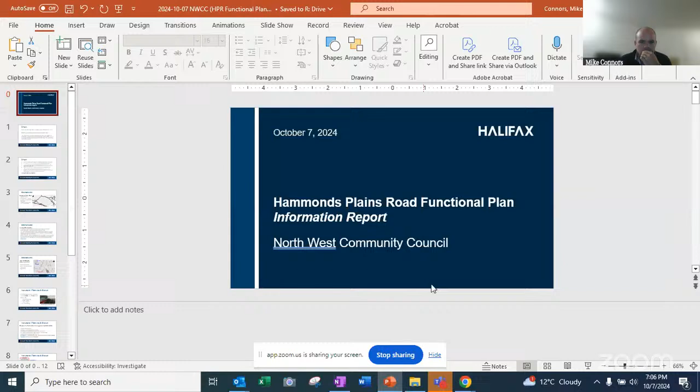Okay, our presentation. Hear me okay? Yes, excellent. I will share my screen. Let me know if you see it. Yes, thank you. You might want to just expand that. Yes, there we go. Perfect, thank you Mike, okay good.

Thanks very much. Mike Connors, Manager of Transportation Planning, happy to be here today to talk through the Hammonds Plains Road Functional Plan Information Report that was at the Community Council meeting last month. I'm joined by Leah Perrin from Regional Planning, who will be able to help in answering any planning-focused questions. Just a couple minutes to summarize the contents of that report. The origin of this report was from last October, and it asked for a staff report outlining and prioritizing the steps needed to initiate the planning and consultation process to develop a functional plan for Hammonds Plains Road.

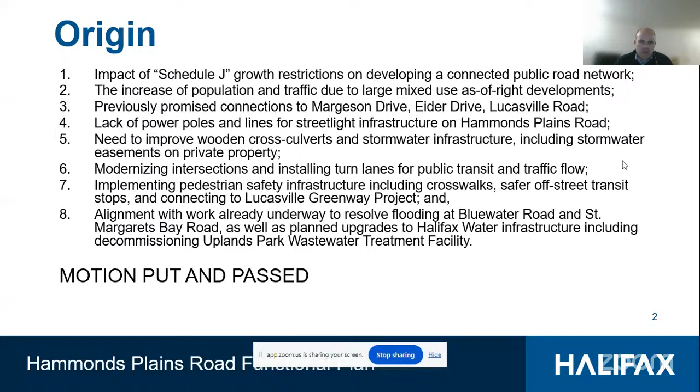The report should include the following, and there were 8 different issues that were identified. This report has gone through and talked about these issues and about the functional planning process and how it could potentially be applied to Hammonds Plains Road. I'll give a little bit of background on the area and then talk a little bit about what's in the report.

So Hammonds Plains Road is an arterial roadway. It runs approximately 19 kilometers east-west from Tantallon to Bedford. It's a key route both for regional and local traffic. Obviously it's the main thoroughfare for people that live in the area and the communities it runs through, but it also plays a role in moving regional traffic given its connectivity between Highway 103 and Highway 102. So you see both regional and local traffic using it regularly.

It's a long corridor, 19 kilometers, with variable geometry, so it doesn't look the same throughout. West of Pockwock Road, it's more of a true arterial road with well-spaced intersections and access control. Between Pockwock and roughly Larry Uteck Road, it's more of a rural cross section, rolling hills, lower density residential and commercial abutting uses. Then as you get closer to the 102, it widens out to 4 lanes around the highway. So it's quite a varied corridor, but that's expected given how long it is.

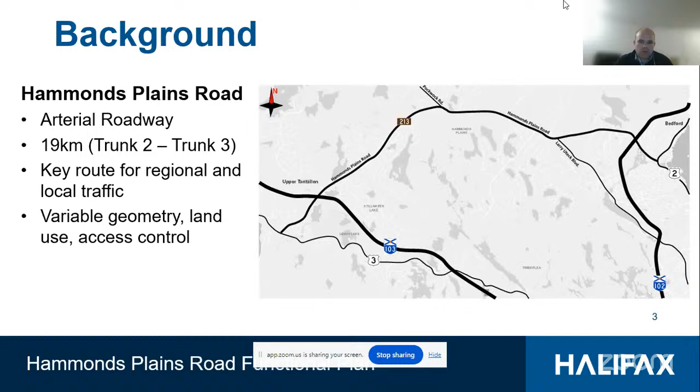A little bit on land use. There are restrictions on development that have been in place in the Beaver Bank, Hammonds Plains, Upper Sackville area since 1998. The 2006 regional plan further restricted development within these areas by limiting residential subdivision, known as Schedule J, until transportation capacity is increased. Despite Schedule J growth restrictions that limit development in the area, there are several as-of-right developments that have been permitted to proceed on existing lots and on new lots proposed on existing public streets.

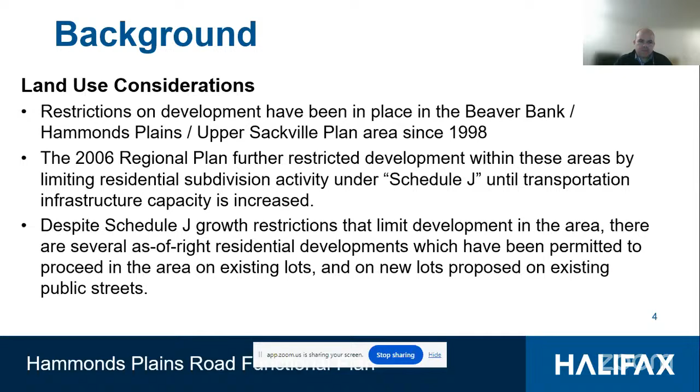There are a few key future potential road network improvements that relate to Hammonds Plains Road. The Beaver Bank Bypass and Middle Sackville Connector have been proposed since the 80s and 90s, a collector road that would extend north from Hammonds Plains Road to the 101 and beyond into Middle Sackville and Beaver Bank. That project has been idle for a couple of years, but HRM has purchased some of the corridor required to build the road, though it's currently not actively moving.

Sussex Drive is a proposed community connector road between Stillwater Lake and Hubley. There have been some land issues, and it hasn't really moved much in the last couple of years. And finally, Highway 113, a proposed provincial highway that would connect between Hubley and Bedford, connecting Highways 103 and 102. That project is a longer-term priority for the province as we understand it.

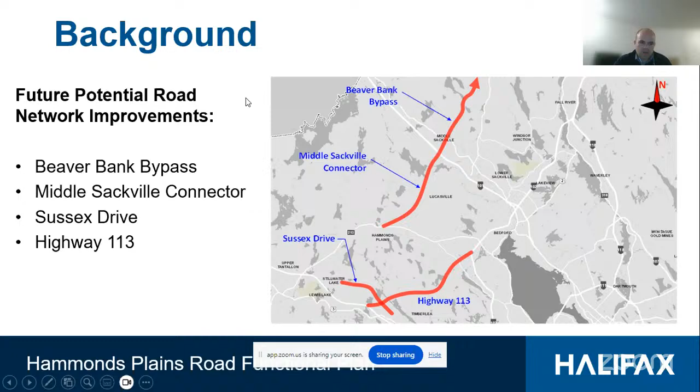I wanted to take a minute to talk about the functional planning and design process, just so everybody understands what that means. We've done a few of these in the past few years, guided by the Integrated Mobility Plan, looking at strategic corridors and reimagining what they can do to better suit current and future needs. Most of our roadways were designed and built a long time ago when the population was a lot lower, and some of our priorities for mobility were different, more car focused, less focus on moving people, and that's where we're headed now.

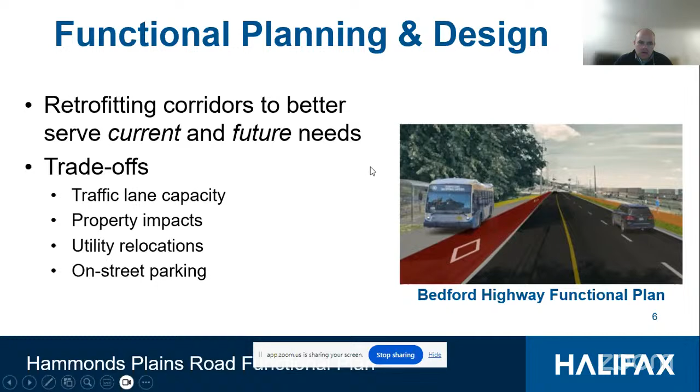So looking at different corridors, establishing what we want to do with them, and then developing options for how we can try to achieve that. Looking at whether you want to add bus lanes or widen a road, what does that mean for traffic lane capacity, property impacts, utility relocations? There are all these trade-offs we need to consider, and functional planning allows us to look at all these pieces and put it together to really understand what's possible on some of our strategic corridors.

Going through the components of the functional planning process we typically look at: we always start with an existing conditions review to understand the physical characteristics of the corridor and traffic demand. Then we get into estimating future transportation demand. Based on existing traffic volumes, we project traffic into the future, estimate how much traffic proposed developments will generate, and project that out to a horizon year to understand future demand.

Next, we establish the objectives and measures of effectiveness for the study. No two corridors are alike, and different corridors we want to achieve different things. Some corridors are transit priority corridors or bus rapid transit routes, so there we typically try to find as many ways as possible to prioritize the movement of buses. Other corridors may be more focused on making active transportation connections or increasing traffic capacity. So we establish what we want to achieve, and that helps guide the design process in determining what we recommend to do.

Next, we would develop infrastructure upgrade options. So based on the existing conditions review and what we want to achieve, we would come up with design options aimed at improving things, a bunch of different cross sections, and try to evaluate what those infrastructure options do to achieve our objectives.

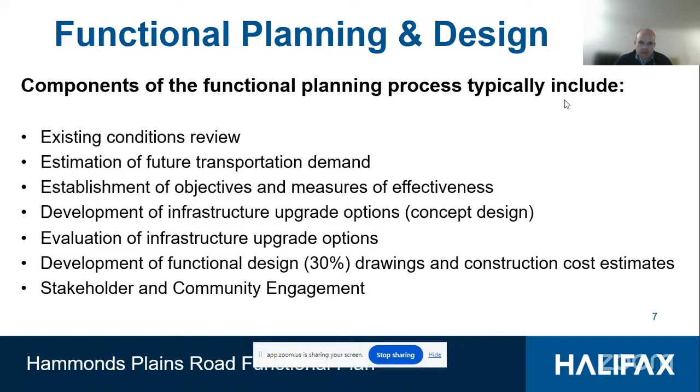Functional design is really the first step in reimagining how a strategic corridor can be redeveloped. We develop ideas up to 30% as described, then typically go to regional council with a recommendation. Once council gives direction on a proposed functional design, we move into subsequent design stages: preliminary or 60% design, detailed design, 90% design, and then tendering and construction.

We start with functional design focusing on an overall corridor, a very long area. As we move through the process, those segments get smaller and smaller because the detail we're going into is increasing.

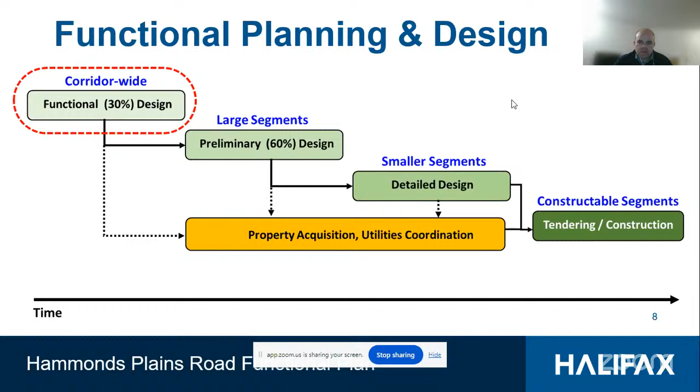That was more of a generic look at the process. Some key considerations for Hammonds Plains Road that were requested in the report: the impact of Schedule J growth restrictions, a summary of the area, growth restrictions, and how they influence road network development. We would develop those as part of this project.

As-of-right developments: an estimate of traffic demand expected from any outstanding as-of-right developments on Hammonds Plains Road would be developed and summarized, and subsequently used to model and assess traffic operations along the corridor.

Those planned roadway connections I mentioned, the impact of those connections on traffic volumes on Hammonds Plains Road, would be assessed using HRM's transportation demand model.

Street lighting was another issue that was mentioned, so a review of street lighting would be completed to determine any areas along the corridor where improvements may be needed.

Stormwater infrastructure and flooding mitigation: a review of existing data on flood modeling and assessment of existing stormwater infrastructure in the area would be completed to identify any deficiencies and associated mitigative measures.

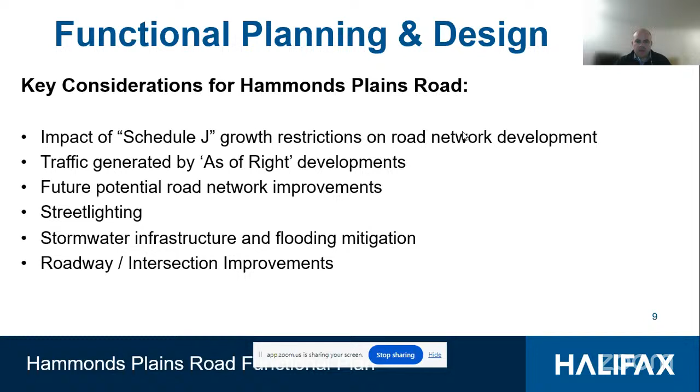Finally, roadway and intersection improvements: potential improvement options for transportation infrastructure along the corridor will be developed in response to any deficiencies identified as part of the analysis. A couple other considerations to keep in mind.

There are a few ongoing projects that are important to consider. First, the Joint Regional Transportation Agency's Regional Transportation Plan will be considering those roadway connections we talked about earlier, ones that haven't moved much in the last couple of years, but given the growth, there may be a conversation to start moving those projects forward.

That plan will also consider the Future Serviced Communities Study being completed, which looks at Sandy Lake among three other areas in HRM for development, understanding what infrastructure requirements would be needed for different development scenarios for Sandy Lake. Both studies are nearing completion and should be done later this year, so we'll have a lot more information to inform what we do on Hammonds Plains Road after that.

The Strategic Growth and Infrastructure Priority Plan is another project starting next year that will take into consideration infrastructure in this area.

Another consideration is the corridor length, 19 kilometers, which is really quite long for a functional design project. Our longest one to date was the Bedford Highway Functional Plan, presented to Council in 2020, which was about 10.5 kilometers. So 19 is quite long. There could be an argument, if Council wanted to proceed with a functional plan, to reduce the study area, potentially doing it in phases.

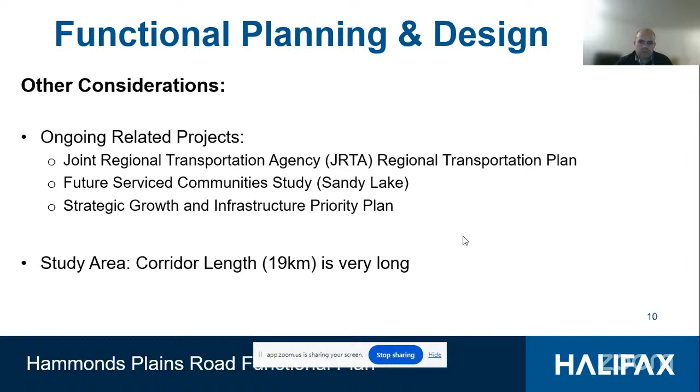In terms of actually getting a project like this done, it typically would take approximately 12 months, depending on the scope and elements that are included. It's a pretty big project, so even 12 months might be pushing our luck, but it's probably achievable.

In terms of resource requirements, HRM would have to assign a project manager and a technical steering committee of subject matter experts to support that project manager. And we'd need to hire a planning or engineering design consultant. We put a pretty rough figure at about a $500,000 study to complete this work.

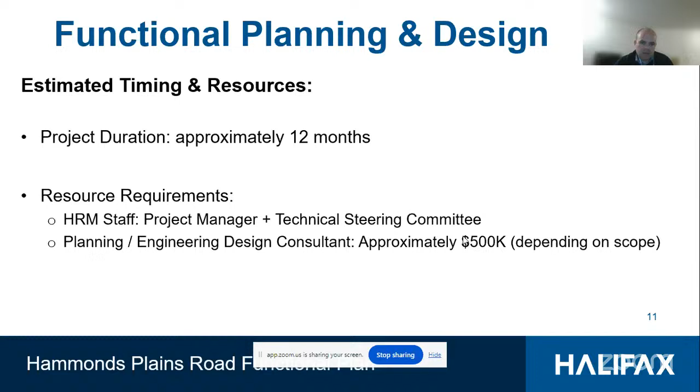So that's my summary of the report, and I'd be happy to answer any questions.